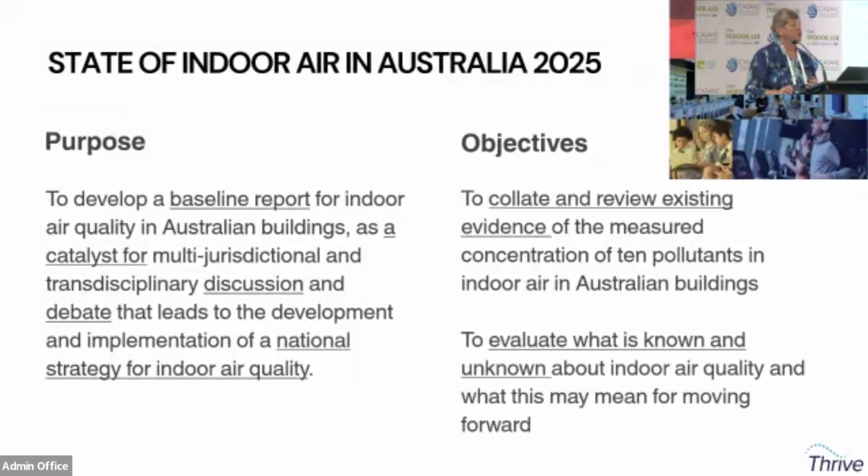There are 2 objectives for this report. The first was just to collate and review existing evidence. So this is, unlike a lot of the things that Lydia referred to in the past, just relating to scientific papers that have been published in peer-reviewed journals, so no conference papers or books, that have actually measured one or more particular pollutants in Australian buildings. So it's the quantified data, and then from that data to try to evaluate what do we actually know and what don't we know about buildings.

So that's the start. In December last year, Thrive hosted a one-day forum with quite a few people online where we were drawing the initial links between how indoor air quality is related to health, to greenhouse gas emissions, to climate change, to energy emissions, to dynamic optimisation or how building ventilation systems can be part of the solution, and to collaboration and transformation. And it was the feedback from that forum that helped determine what would be included and excluded in this report and how it might be structured.

So the context or the methodology for developing and formatting the report was driven, from my perspective, on 2 things. The first was on what do any Australian regulations currently say about indoor air quality, and what are the pollutants that we should perhaps focus on in the first instance, because you can't cover everything all at once. You'd never get a report finished.

So my main area of experience in the last 20 years has been on building regulations, so that's where I started. So the National Construction Code is a model code, and each state and territory is responsible for ensuring what happens in buildings. But most states accept what the national model code is. And the code sets out the minimum requirements for protecting the safety, health, amenity and sustainability of buildings. All of those are in the goals of the code. And it's supposedly a performance code, so there are performance requirements that buildings are meant to demonstrate that they achieve in the design and construction of the buildings.

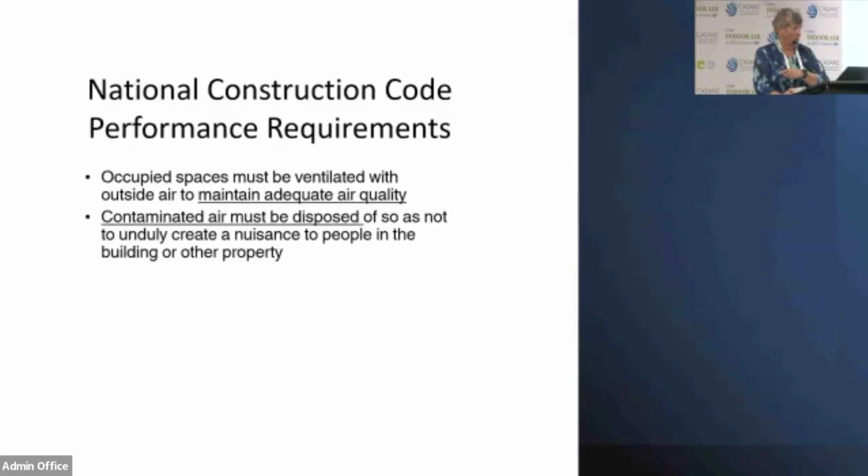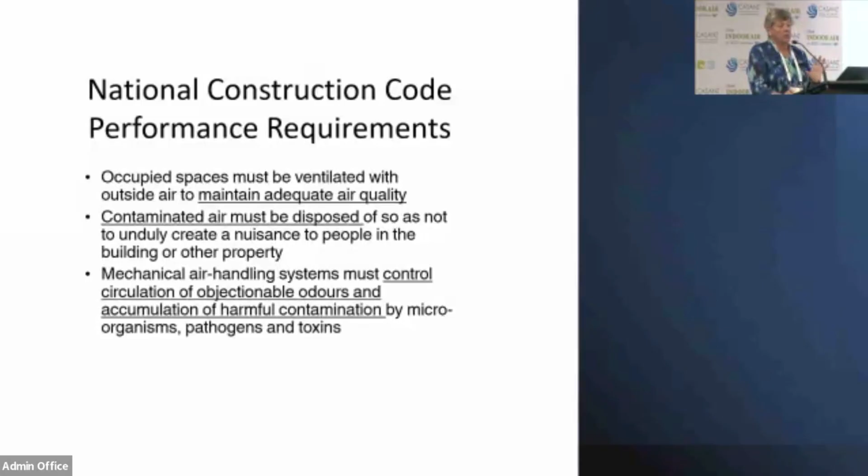So in air quality, there are 3 requirements in the legislation that must be met, theoretically at least, regarding air quality. First of all, that occupied spaces in buildings must maintain adequate air quality. And that's the exact wording of the code. And I want you to remember that word, adequate air quality. Secondly, that contaminated air must be disposed of so it doesn't cause a problem somewhere else. And the third performance requirement is that mechanically ventilated buildings must control harmful contaminants. That's what's in the code itself.

Then the Australian Building Codes Board publishes an indoor air quality verification methods handbook. So this handbook is not part of the code, but it provides advice to the building industry on how they can meet those performance requirements. And in this handbook, there is a table of 8 contaminants and concentration limits for those 8 contaminants.

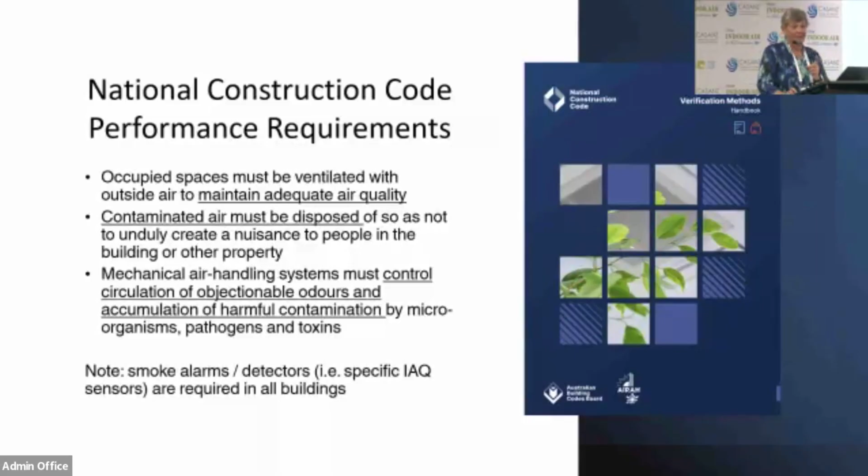It's also worth noting that we already have mandatory indoor air quality sensors in all buildings, and in multiple spaces in all buildings, and they're our smoke alarms. So we already have a precedent for having monitors of air quality. In this sense, it's just for identifying if there's an air quality issue that might be associated with smoke and fire, to give people enough time to evacuate the building. So it's not to do with health per se, as opposed to get out of the building before you burn type of thing. So that's really important to acknowledge.

The second set of legislation that deals with air quality is WorkSafe Australia. So this again is a model set of codes nationally that each state has to then put into their regulation regarding workplace health and safety. So I haven't examined each of these state-based WorkSafe things, but I will talk a bit about what the model code proposes. So the code requires businesses to do three things, in essence.

Businesses have a duty to manage work health and safety risks of air pollution that happens in their businesses. They have a requirement to provide and maintain a work environment that is without risks to health and safety, and, in essence, they need to adopt a risk management approach. So businesses need to be able to identify what hazards might be in their workplace, when they might be present, and what sort of level of risk they might pose.

So these are requirements of WorkSafe Australia and requirements for every business in Australia, and that relates not only to the workers in those businesses, but to any persons who go into those businesses to buy things or have services. WorkSafe Australia also produces workplace exposure standards at the moment, which will actually change to limits late next year.

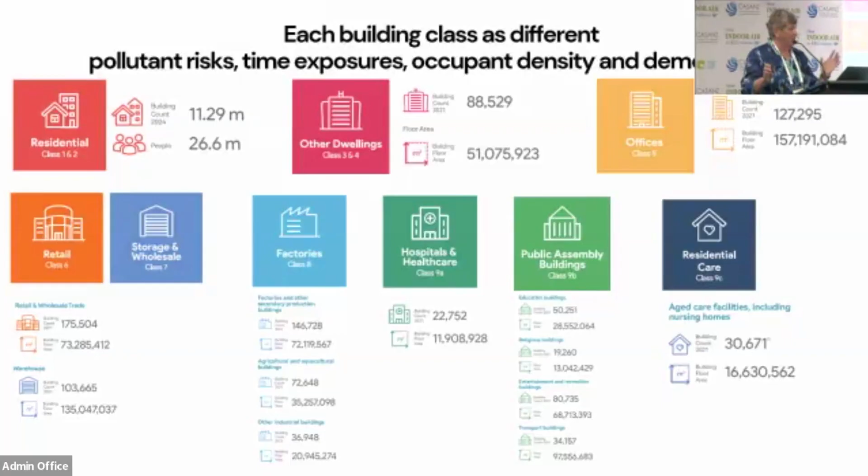So at the beginning of each chapter of this report, you'll find the scope of the buildings we're talking about. Our last step was deciding which contaminants to focus on, because we can't do all contaminants in the first instance. We combined the recommendations in the blueprint document that Lydia talked about with the 8 contaminants currently listed in the Construction Code Air Quality Handbook and the World Health Organisation guidelines from 2021, which came up with a list of 10 pollutants.

These 10 pollutants were then used as the keywords in a systematic literature review. So this document does not include papers about mould or airborne pathogens. We had to draw the line. It's not that they aren't important; we had to start with something. Subsequent reports certainly need to include those things.

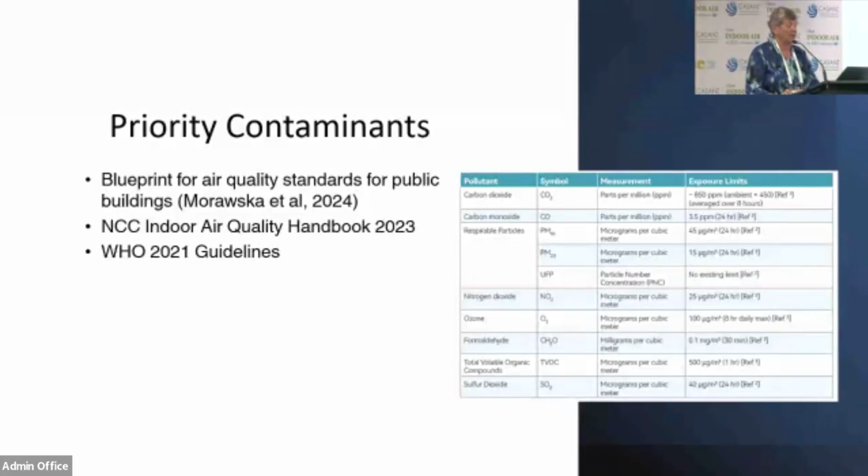So we did a literature review looking only at peer-reviewed scientific papers from 4 databases. And what did we find? So we're also only looking at papers published since 2000. We identified 106 peer-reviewed publications that encompassed about 2,000 buildings.

We added to that data from NABERS indoor environment quality ratings. So NABERS energy ratings have been going on for years, and they're mandated for office buildings over 1,000 square metres, but their indoor environment quality ratings are voluntary, and they've been going since about 2009. So we got all of that data, and all of the ratings that have happened since 2009 encompassed about an additional 450 buildings.

So that means the total number of buildings that are in the data set that we're talking about today represents less than 0.03% of our building stock. So any information that I present from this point forward is only talking about a very small number of buildings over a 25-year period. So it's a snapshot of what we know. It's not a definition of what we know.

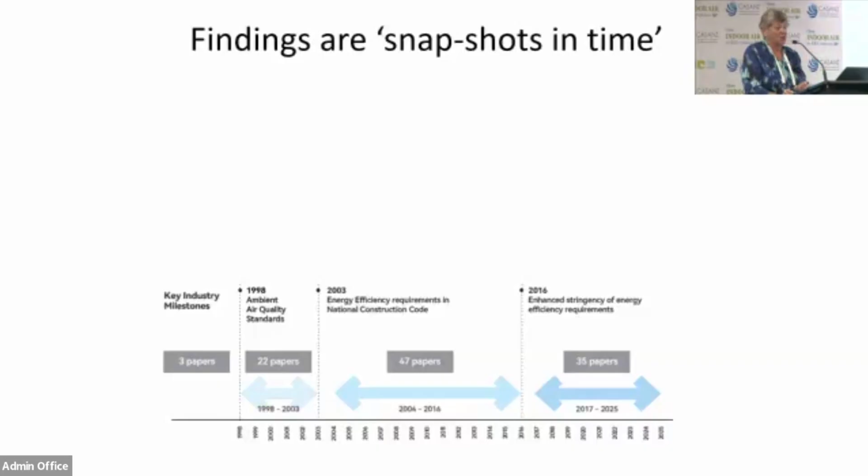So as a collective of all 106 papers or so, the papers do present a number of insights into a range of indoor air quality conditions over time. They highlight some of the contributions. They quantify the importance of source control, ventilation and filtration as some of the strategies for improving indoor air quality.

Interestingly, they provide different multidisciplinary approaches. Some of the papers are by aerosol scientists, some of the papers are by building engineers, some of the papers are by medical scientists, etc. They all have different approaches, all valid approaches, and there's different solutions and strategies that can be applied.

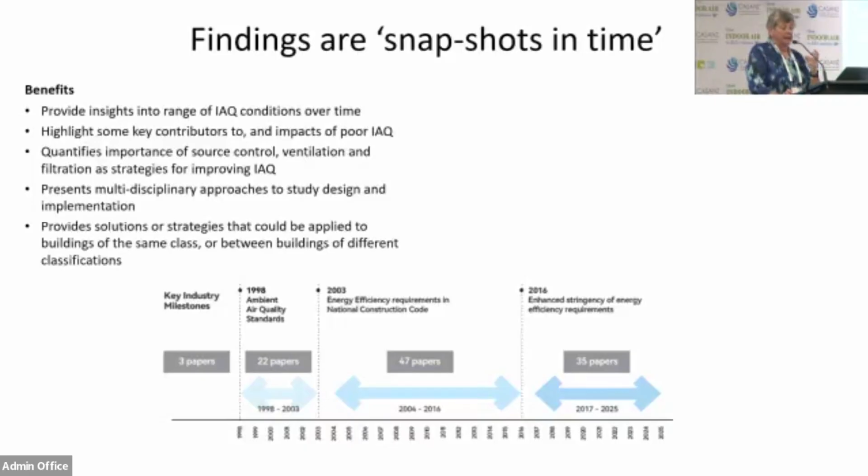However, as a collective, there are also limitations. So first of all, the limitations: we're only looking at 10 pollutants, we're only looking at peer-reviewed published papers. But the limitations also are that in each of these studies, the measurement timeframes were very short, from a few hours up to, in a few instances, 1 year.

So there are no studies on continuous monitoring for a long period of time. Most of the reports were only also about a small number of rooms or zones within a particular building. Some, it might only have been one area, like the lounge room in a house, for example. Generally, the papers talk about the mean pollutant concentration with minimal discussion about peak concentrations. There's generally a lack of analysis about the duration of concentrations at different levels.

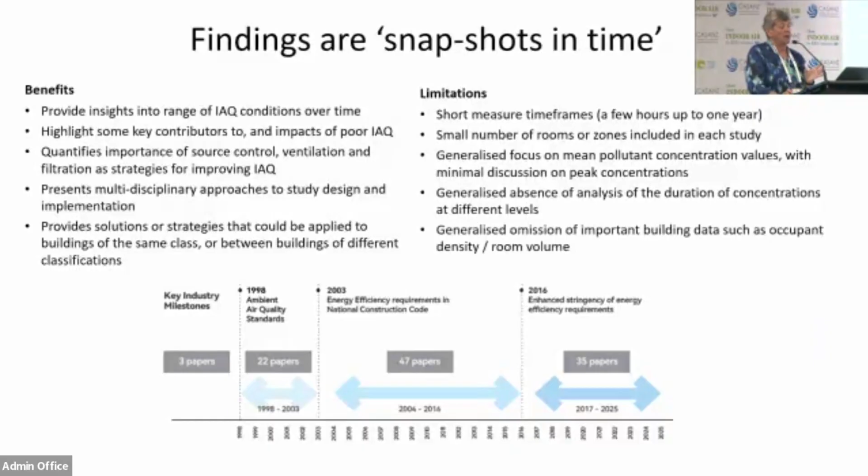For example, concentrations at a 1 hour or an 8 hour average or a 24 hour average, and limited data in lots of studies about other things that actually impact on that air quality, such as occupant density or the volume of the room. And in order to be able to put in some solutions from a ventilation point of view, you need to know what the volume of the room is, not just it was a classroom, or how many people, what size is the classroom, etc. So there are limitations to the studies as well.

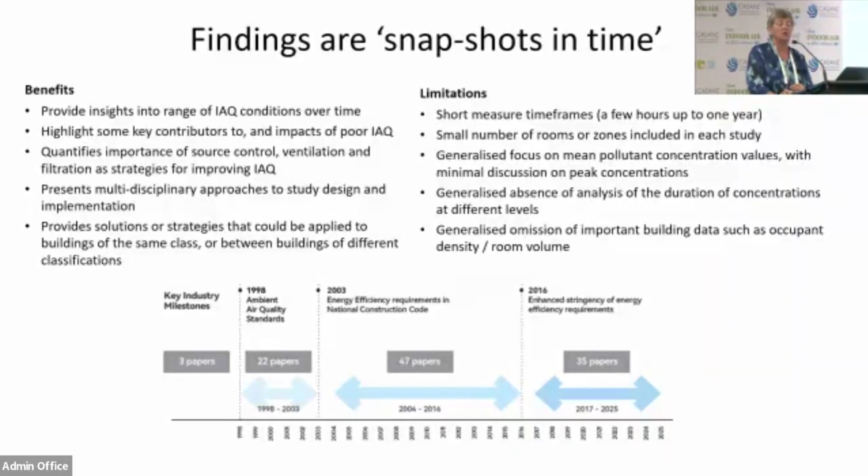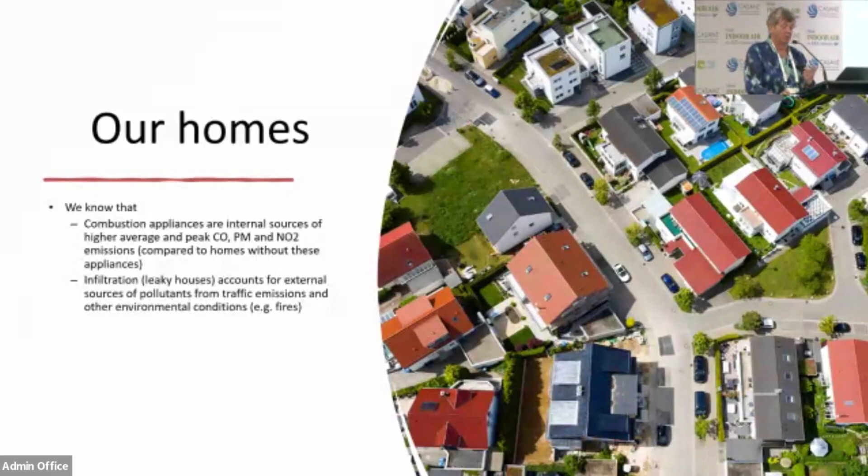So I'm just going to flick through a few of these slides. So there's a number of things that we know about our homes. First of all, the 2 most common things that were reported about homes were the impact of combustion devices. So gas appliances essentially, but also wood fire in some states. But the influence of combustion devices as an internal source of pollutants, and infiltration in particular from transport emissions and from ambient air such as bushfires. So infiltration and combustion.

But what we don't know from the studies, and I think the household studies account for about 80 of the 107 papers, we don't know if indoor air quality in our housing is good or bad or adequate. We don't know whether it's improving or getting worse, because these studies were done over a 25-year period, and there were no repeat studies of the same houses done every 5 years or something like that. We don't know how widespread poor indoor air quality might be.

We don't know whether indoor air quality is worse in some states than other states, worse in regional areas than in cities, worse in apartment buildings compared to detached houses, because the vast majority of papers were about detached houses, and only, I think from memory, 3 or 4 papers were actually about apartment buildings. So there's a lot that we don't know. And that first of all raises questions to me, because the issues of combustion devices and traffic emissions also arose in most of the other building classes as well.

So my initial thought from a cross-disciplinary multi-portfolio approach is, as low-hanging fruit, what would happen if we, for example, banned gas appliances in houses and schools and all buildings, and we electrified as much of the transport as we could, particularly commuter cars. These things in themselves are already part of Australia's climate change target or carbon reduction target, or the electrification of housing that the National Construction Code is considering, or the electrification of transport, the energy affordability. Just those two things in themselves are already potentially a good alignment with existing policies.

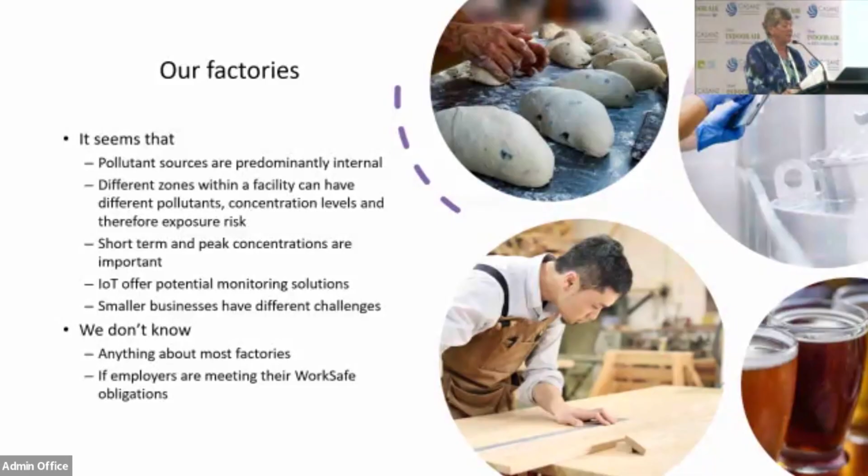There's information about hospitals, about public buildings. Public buildings, if we talk particularly about schools, it's really important to consider where schools are placed from a town planning perspective, because quite a number of reports are about the traffic emissions and the impact on young children.

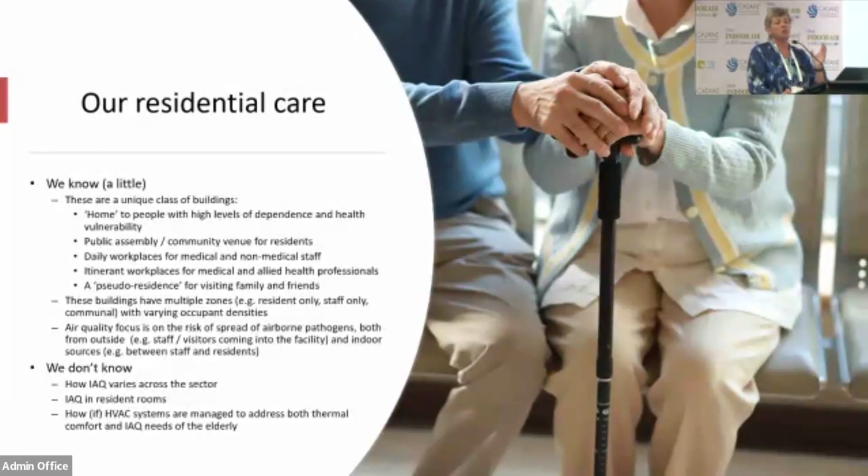Then there's things about residential care as well. Residential care is perhaps the most unique class of building because it's home to the people who live there. It's also a community venue. It's an everyday workplace for some professionals. It's an itinerant workplace for other people, and it's a pseudo-residence for the family and friends that come to visit them. So there's multiple things that happen in an aged care centre.

Disaster management is another one that we'll look at a little bit later today. So private bushfire shelters, there are no data studies about that type of shelter, but it does raise the question about, do we actually need other types of shelters? And I note that there's a paper being presented later this week about clean air spaces and how residents might be able to develop a clean air space in their homes, and what implications there are for public evacuation centres.

So just quickly to finish, what is it that we want? And for me, first of all, when I read in the construction code that there's a requirement for adequate air quality, is adequate what we're aiming for, or are we after safe and healthy? And is that an opportunity to, first of all, change the word in the building code?

And is the risk assessment process that we looked at before a mechanism for understanding where are the other gaps in knowledge? Is it gaps in scientific knowledge, or is it gaps in translating that knowledge into practice, or disseminating that knowledge to the businesses that are meant to be doing this process to show that they're meeting their obligations? Or do we need more information about how do we actually get the health costs included in the benefit cost analysis process that's required in all regulation?

So the purpose of the report was this is a baseline, so it's not the be-all and end-all. If you notice any mistakes in it, they're mine. Tell me about them and we'll fix them on the next round up.

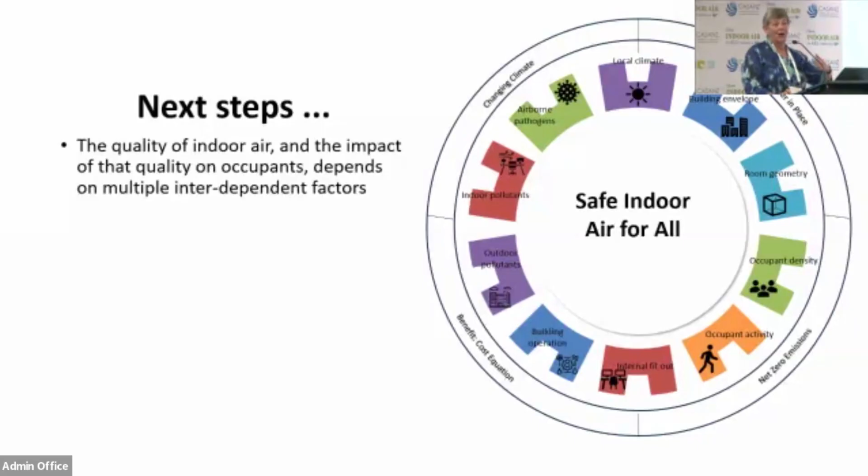But getting it right depends on a whole range of things, and it's not just the indoor air quality. We need to consider the local climate. We need to consider the building itself and its geometry. We need to consider the occupants, how they occupy it, who they are. We need to consider how the building is fitted out, what its HVAC system is, etc. We need to consider outdoor and indoor pollutants and airborne pathogens, all of those things together.

And arguably, we also need to consider what all of that means in a changing climate. What does it mean for our disaster and resilience management strategies? What does it mean regarding our net zero targets and our need to not put in more greenhouse gas emissions? And what does it mean from a cost-benefit analysis? So all of those things are things that we need to consider as we move forward.

So the rest of today's program, we have 3 panel sessions that are aimed to explore some of those issues regarding what this evidence, as small as it is, means in terms of going forward for science, for practice and for policy.